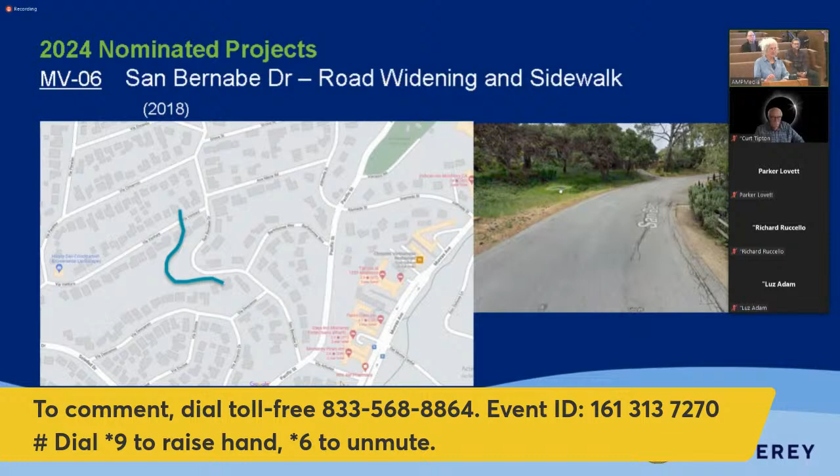I didn't realize that was on the list. I was just saying to my husband 2 weeks ago, they really need to put that curve on a neighborhood vista, or whatever you call the NIP program, because it is seriously one of the most dangerous small little spaces in a walk to the mall.

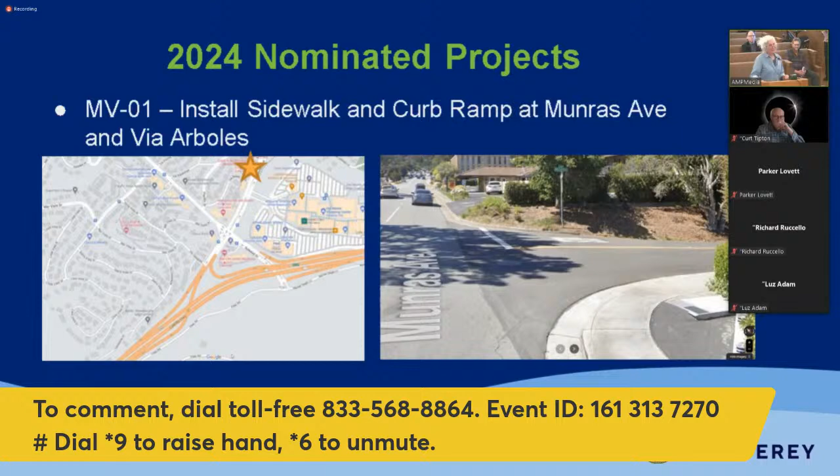If you're coming across and up the street, like from San Bernabé across and then head toward the mall, there's that one little spot. I mean, it's not very big, maybe 2 of these wide and 2 of these that way. And those cars rush by you and there's no sidewalk. It's a sloped hill, and so you're kind of trying to stay on the dirt as the cars are going by. It's really, really hazardous. So that being said, I'm glad to support that.

I'm really here to talk about MV06. So the neighborhood got together back in 2018, and a number of residents came together to put forward this request to address the real safety issues that exist in the San Bernabé curve.

It's hard to see on either of these pictures, but this curve actually goes downhill and then back uphill, and curves at each side of the hill and narrows in places and has no sidewalk. So children from school walk there, mothers with carriages push their babies, people bicycle, many people walk, some of us less young than others. And the kind of agility that you need to have to navigate that is just amazing.

So we are here. We have met, as was said earlier, with Reggie and the engineer who developed the plans, because thank you, you all approved it a couple years ago to have the plan written. And the neighbors in general that we've talked to, 6 out of 10 are very much in support of this.

We've had some changeover in ownership of the property and we're reaching out to them. We've reached some of them, and in general, the folks that live there really support having a safe walkway and are not really concerned about the impact that will be on their property.

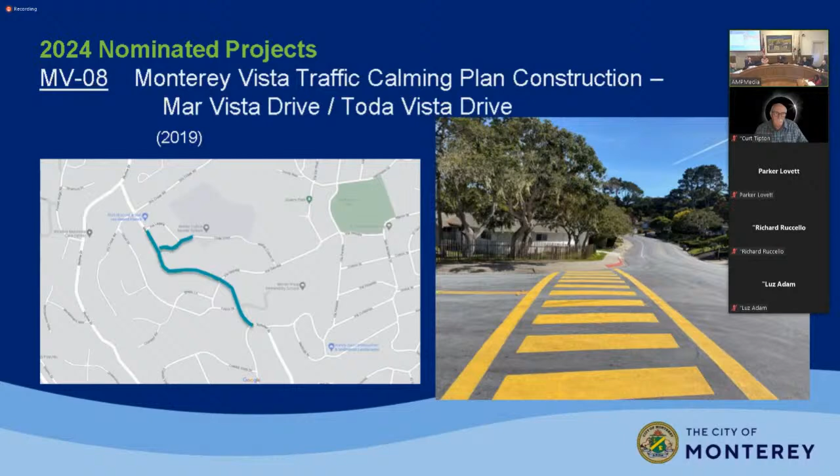In the meantime, Fisherman's Flat. This reminds me, this commercial thing that was brought up, the same thing applied to a project we had a couple years ago that was on the corner of Munras Avenue and El Dorado. There's an old motel there and there's dirt along, and right now people have to walk in the dirt, and it's a problem where we had to get the owner of the motel to fund it. And I drove by there just a week or so ago and it's still dirt. It's the same problem, getting the commercial person to pay for it. So this is not a new problem, this is a problem we've had before. So good luck, I'll talk with Reggie and we'll work on the legal stuff for that sidewalk project. You bet.

Other comments, questions from the committee? Linwood.

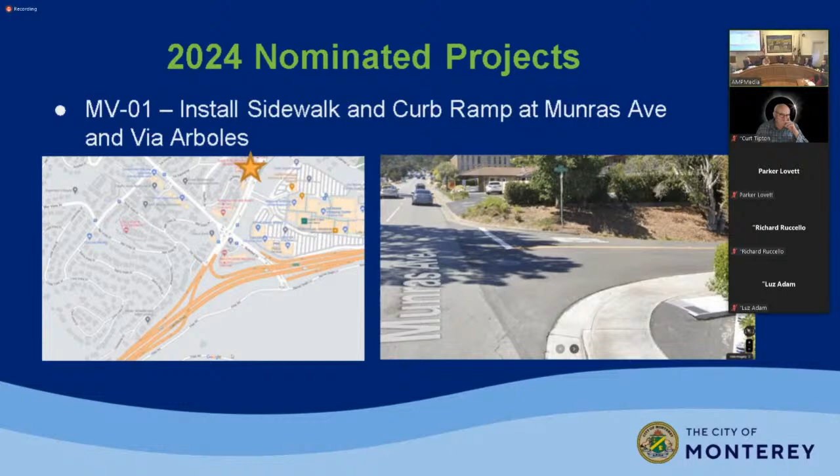I'd like to comment on MV7 regarding the highway sign. I go through there quite a bit when I'm going to work, and there's constantly people that have lost their way and they can't get to the highway, they can't figure out where it goes. The regulars obviously know how to get there because they've been doing it, but they wind up doing U-turns, illegal U-turns, and it causes traffic problems. So I really feel that we need that highway sign there giving directions, and it won't cluster up too many signs. It's a needed one, definitely. Thank you.

Other comments from the committee? Then I'll add real quick my kind of question comment. I remember us asking the city to write letters to commercial property owners, notifying them that they need to put it in. But the interesting thing would be, can you get just one side of the corner done and not do both sides? And the question I had is, in the old days, we used to have a sign department, so signs were not something we had to worry too much about. So I don't know if we can just refer it to the sign department. Yeah, we still have a sign department, but I don't know, I can follow up on that. Thank you.

Hey, thank you everybody, that's Monterey Vista. Next up would be New Monterey. So let's hear our overview first.

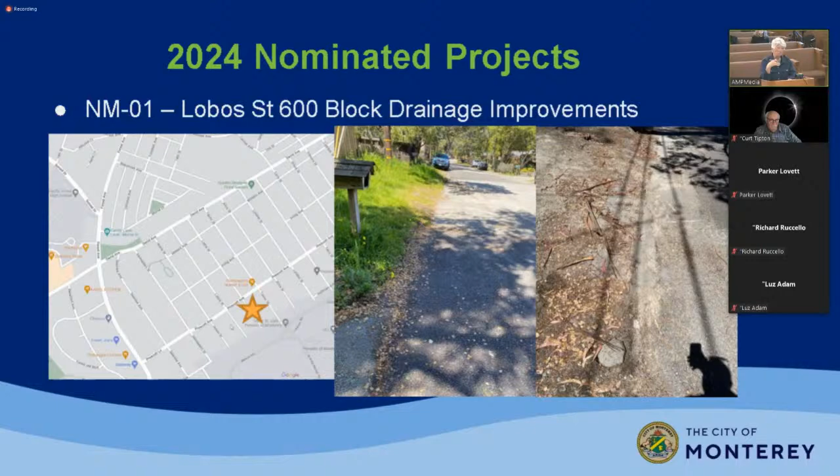David Avenue open space. The New Monterey area plan says that if it is obvious and we want to have open space, trees, green space, that this is something that we want. And the school district, it was an oops. When they transferred the title to Hilltop, what became Park Center, they forgot the other parcel.

This is the entrance to the neighborhood. It is a stand of trees. It is not the original, it should not be the cost of the original project. It would be only for the legal transfer of title. It does not need a lot of tree work, which really inflated the price before. It's finishing something that should have been done.

The New Monterey 8 or 12, Hilltop Park Center roof has been leaking like a sieve for years. It really needs work. It would be lovely if the city could share the cost of fixing their facility.

New Monterey 11 on the Cannery Row sidewalk, traffic calming, that was not part of any traffic study that was done. Cannery Row 16, Cannery Row restroom design - Cannery Row business people are going to pay for the maintenance that was never part of the downtown wharf restroom study. It never was. It should not be held up for that.

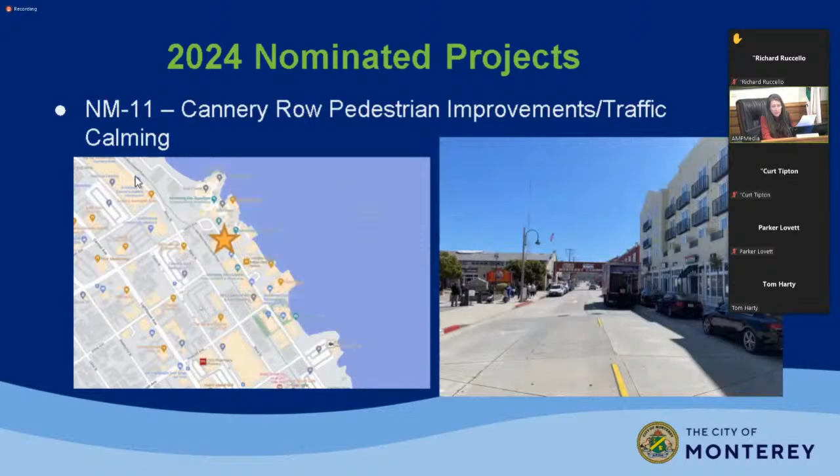If not, I have a quick question or two I wanted to sneak in. One was, we actually did look at the grass on New Monterey 09 in the past, a number of years ago, and I think one of the issues is that place continues to have issues around how that grass grows in that space with that dirt and that drainage. So I don't know if we want a brief comment on that.

Okay, my first question is, is that a shared use area? Because when there was an NIP project there to put playground equipment, it was always a problem getting in there because they would lock the gate and the neighbors would call all the time. So that should probably be checked. And the drainage—that part of town does not drain very well, so they always have problems with the turf there. I don't know if the public's allowed to use that when school's out. I think that they do. Yeah, because they used to lock the gate and it used to cause a lot of problems there.

So the answer is, yeah, they do have a shared space. Okay, cool. And another question I had was, does the neighborhood want to combine the solar panels number 5 with number 12?

The restoration, I can check back. I'm getting a no, looking at the audience. No, in terms of the roof that is included in 12, so the solar panels are separate. So obviously we probably want to do the roof first before considering panels.

Right, thank you. I find it interesting that maybe our neighbors to the north, CSUMB, did not use any of the military buildings. They tore them down because it was too expensive to retrofit them.

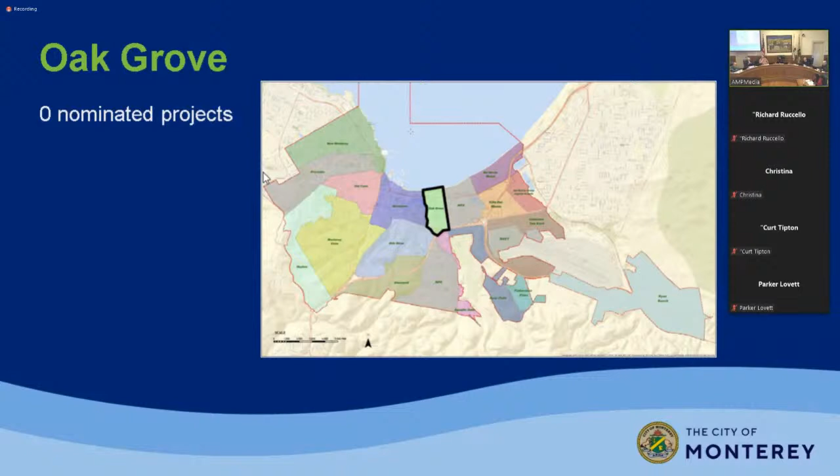We can ask. All right, so with that, I think we'll move on to Old Town. Let's see the list. There's no projects proposed in Oak Grove. And there's 3 Old Town proposed projects.

There's Old Town 01, decomposed granite at the step sidewalk maintenance at Harrison Street and Veterans Drive. And we have an existing project to do similar work. You can check for overlap.

Old Town 02 was a returning project. It's an old accessible park desktop survey. I think the idea was to try and find open space in the Old Town neighborhood that could be used as a park.

Old Town 03, another returning project, would be to honor garden at the current fire department, police department facility. I know we've had some long discussions on this last year. There are plans to build a new facility. I think in the past, we've decided that it would be best to wait, I guess.

And then one other proposal on this one would be to maybe include the design of an honor garden in the design of the facility and have it all done at the same time. Those are the Old Town projects.

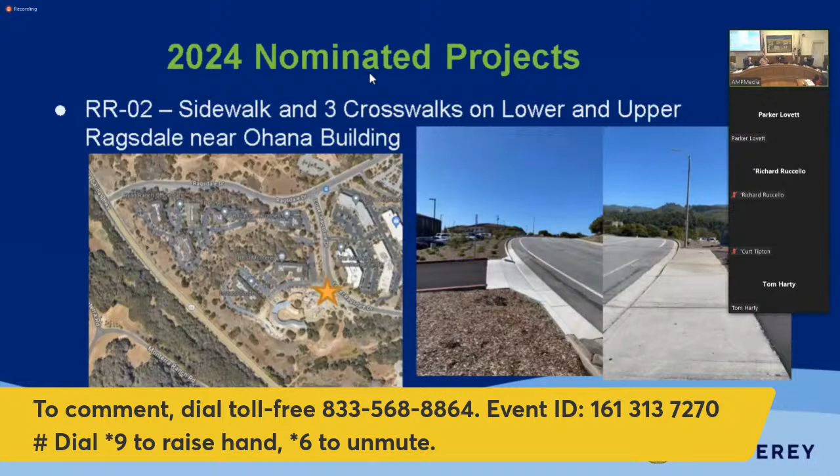All right, and we don't have a representative from Ryan Ranch to add color commentary, so I think we go right to the chamber. Are there any comments on the Ryan Ranch projects? I don't see any in the chamber. Do we have any online and on the phone comments or questions or clarifications for Ryan Ranch? No public comment raised. All right, let's bring it back to the committee then, Ryan Ranch.

Monterey Vista and then Skyline. I'd love to hear from pickleball players, since I'm understanding they were a little caught off guard by the downtown tennis center offering to put in 8 pickleball courts, obviously charging money but being able to do it at a much faster rate, and I think also being less stress on the city for maintenance and definitely less construction costs. So I haven't really heard from pickleball players whether they think they'd like to play down there, or would rather wait for courts out at Ryan Ranch whenever that may or may not happen. Thanks. Thank you, Skyline.

Isn't Ohana a commercial enterprise? Shouldn't they pay for their own sidewalk? Montage.

Quick comment about that, the Fisherman's Flat. I have PT quite frequently at Ryan Ranch, and I drive by there frequently, and I watch them spend millions of dollars on that brand new building. And nobody from the city figured out they needed to have sidewalks. Incredible.

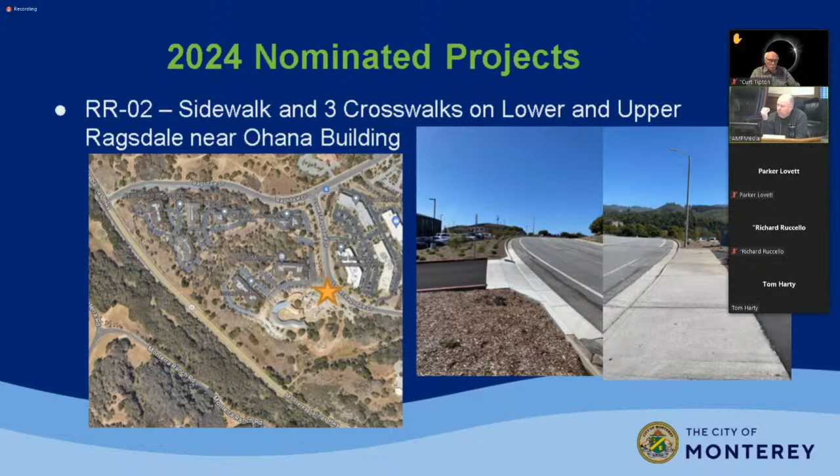Other comments on Ryan Ranch, Deer Flats, and then I don't want to speak for the pickleball people either, but I do recall when they made their presentation, it was about the percentages of the population and how much availability, and I remember they wanted more. So I tend to think they would still want to see this project go through, even if it's being offered by a tennis club downtown.

Okay, Glenwood, and then we'll go online. No, you don't have a comment? No. Okay. All right, so let's go online.

Kurt? Yeah. So is the design complete? And in that design, I believe we were talking about a restroom and handicap parking and that type of thing for RR1? The design is not complete, no. Okay, and those things were items we were going to look at in that project.

Okay, so it's hard to fund this if we don't know exactly what we're funding. Well, I think the request is, and maybe that's my fault - the request is specifically for $200,000. Okay, and I believe there was some discussion in the request of matching.

Okay, so to go over the full application, they're saying the applicant is requesting $200,000 for construction of pickleball courts. Yes, they are. There's been discussion back and forth with the proponents where they talked about raising funds on their own and matching what NIP and/or the city puts in.

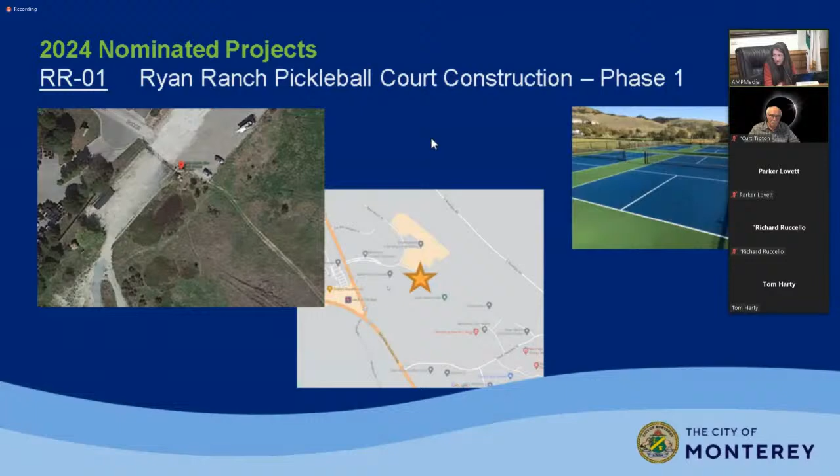Okay, thank you. All right, I don't see any other online. Parker? No other comments. Thank you. All right, bring it back. Any other comments here from the committee? Nope. All right then, that moves us on to Skyline - let's see our list.

There are 3 nominated projects in Skyline. Skyline 01 is Veterans Park Trailside educational signage, geared towards the trees and plant life in the forest area there. SK02 is install new fencing in the bocce and basketball court area at Veterans Park. And SK03 is a returning project to look at erosion control in the day use area. Those are the 3 projects in Skyline.

Thank you. Skyline, do you want to give us some clarification? Well, Skyline 1, I'd say on the previous comment that was made about - we have a signs department, don't we? This doesn't seem like a giant project when it's kind of guessed at $1,700-1,800. So I wonder, well, there's a bid in here for $1,622.75 - is this really an NIP project?

I don't know, NIP project? You talking to the mic? Phone's on. I guess I gotta pull it closer? Yeah, I gotta get my face closer. Hi folks, is it working now?

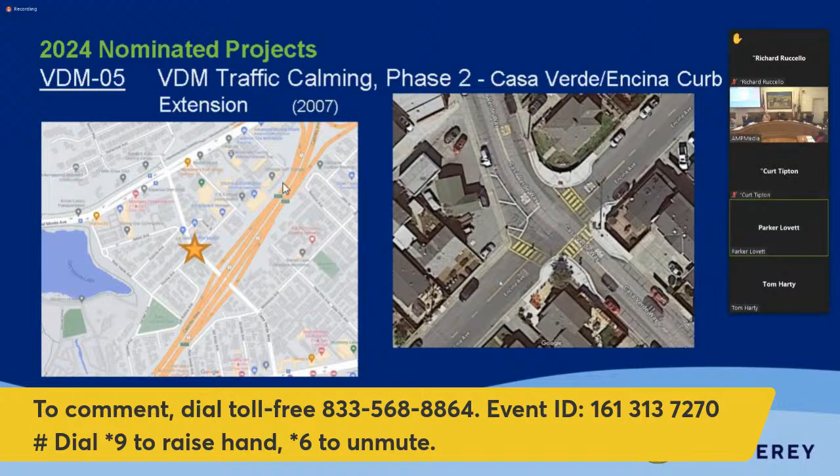So do we have anybody in the council chambers that would like to address any of the Villa Del Monte projects? I don't see anybody coming up to the podium. So if we take a look online and on the phone, do we see anybody? No comments raised online. Oh, one committee member. So I think then we'll bring it back to the committee. And since Richard got his hand up so fast, he's in there. Thank you.

My concerns on remodeling are the same with this fire station—they're all in the same time period. I want a safe structure. I know they condemned the hose tower, which they use for training; that has to be reconstructed too. So it's more than the roof, it's more than the kitchen. It's make the building safe, then do the modernization.

I do want to comment on the Casanova Oak Knoll project. Maybe Reggie can tell me what it is. I think it's an old project we dropped. Is that the, what do they call those, the dry wells project? Right, yes, it's a tree box catch basin.

Years ago, we had a problem with flooding at Grandma's Kitchen at Fremont, which stops the entry and exit of our neighborhood, also floods the northbound or eastbound lane, the right lane of Fremont. I've seen it underwater with cars rooster tailing. Engineers' response to that project was to design a dry well the size of a truck, a big hole in the ground filled with gravel, where this excess water would percolate on Dundee and on Lerwick to solve the problem of all the water going down the hill. We got the bill for that, and it was $600,000, but the key element to us was it only solved 5% of the problem, the city engineer's estimate. So we dropped the project. Reggie, you may erase this project—it no longer exists, it won't solve the problem.

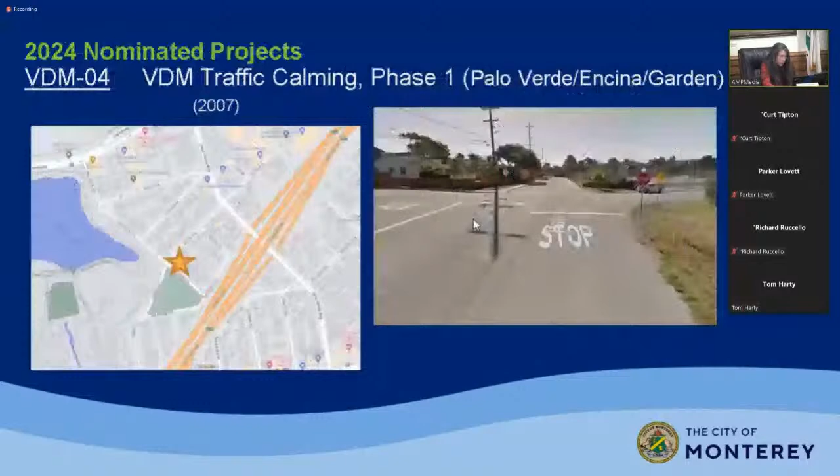I also have a question. I think it might be helpful for us to understand — when we approved the mosaic murals in the underpass, we talked about that as a beautification because so many visitors see that as their first look at the city. And I do think it had art in it. So when we approved it, like last year or the year before, I think some clarification of why we're asking for more money for art would be helpful.

Well, yeah, so we'll have to — I can do some more research and follow up, and we can discuss that the next time this one comes up.

Yeah, the rumor I heard is that the city council took it out. And that's why I want to clarify — well, we didn't get city council... so the original budget for the project was 750,000 roughly, I believe, and city council approved like 600,000 back in 2023, I believe, or '22. So that was somewhat of a sticker shock for the price, but this could be for the difference, whatever that is, like 150,000. But I can follow up and do some more research.

Okay, so yeah, we have a situation where the city council amended the NIP's approvals after the NIP committee approved them. Yes. And they reduced the funding for this project. Reduced our funding. Okay, good.

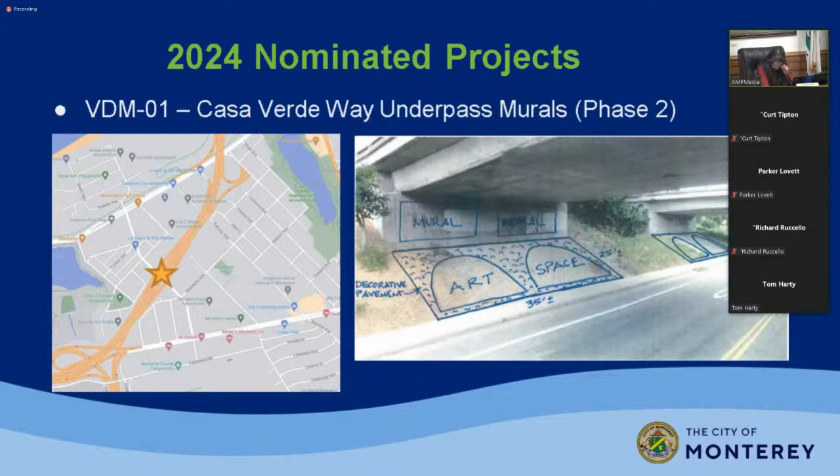Any other comments, questions, Villa Del Monte? Right on. Okay, so next we have multi-neighborhood. Just want to be sure I wasn't skipping anybody. Multi-neighborhoods, so let's see that list.

Okay, there are 14 multi-neighborhood projects. All right, multi-neighborhood 01 is citywide ALPR cameras. This project is led by the Monterey Police Department. The city council approved the police department to move forward with the cameras at the April 2nd city council meeting. So the question is how we want to move forward with this — if we just want to provide the funding to the police department, or if there's something else that the committee has in mind.

MN02 is recreation trail, separate lanes for bikes and pedestrians. MN03 is the combined fire stations 12 and 13 rehabilitation. MN04 and 06 are combined underground utilities programming to address what we all know happens. MN07 is specifically for Del Monte Avenue undergrounding. MN05 is community-wide forest management. MN08 is for a comprehensive fire safety analysis and to develop a hazard reduction program specifically for the urban forest.

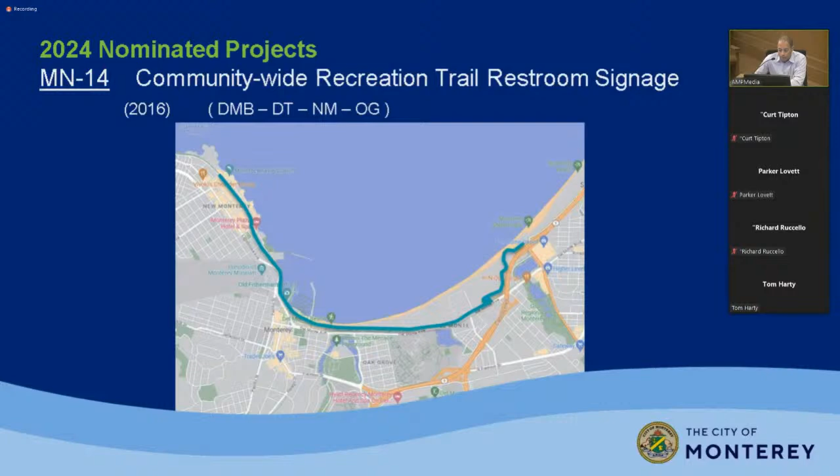MN12, recreation trail bike repair stations, specifically 2 — this is a returning project. MN13, Holman Highway to Viejo Road bike path renovation — returning project. MN14, community-wide recreation trail restroom signage — returning project. And hey, that's it.

All right, thank you. So these are multi-neighborhood. I would propose that, starting with multi-neighborhood number 1, if there's a particular rep who's kind of the lead on this, we'll have them speak, and let's go down through and get the reps' comments on these before we go out to the committee. So is there anybody speaking to MN01?

Fisherman's Flats. Yeah, I was at the city council meeting — Reggie's talking about the police chief. He's the guy that needs to tell us how much money he wants, basically whether he wants any money or not. Agree, it's my project, Jamie. Question is how much? Richard — yeah, this is not proposed by the police department, it's proposed by me.

I proposed this project before the council approved the cameras. I thought it was very important for the safety and security of the neighborhoods and all residents of Monterey and visitors. What I proposed is the purchase and installation of the cameras. I put a specific amount, I believe it was 138,000. It's just to put the cameras in and buy them, not for operation or upkeep, but merely to show citywide support for a very successful force multiplier program for law enforcement.

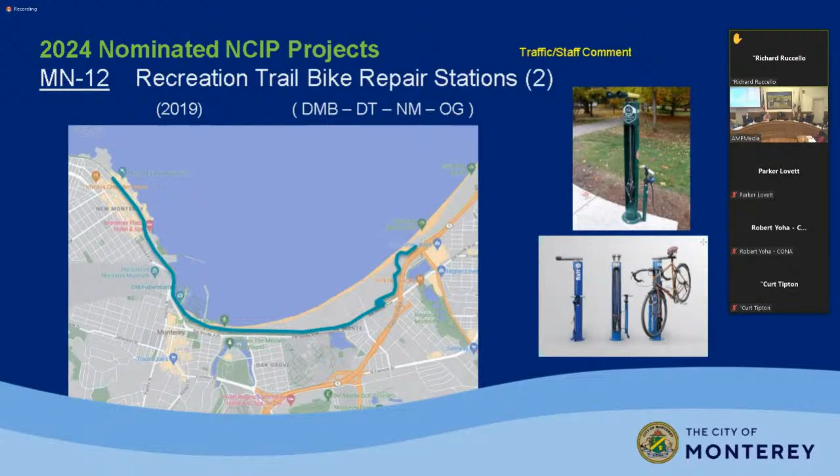Thank you. I have three comments. One, I've been doing quite a bit of research on the Paradise Campfire and the Maui fire. There are a lot of similarities to Monterey in the small number of escape routes—Deer Flats has one, Fish Flats has two, Skyline depends on which direction you're going. Monte Vista the same. For our fuel reduction project, I would like the Parks Department to look at hardening the escape routes. I've been told that in Monte Vista and Skyline there are many pine trees leaning over the street. In those fires, there were high winds and very short warning.

It's not hours, it's minutes when a fire crowns and goes across the top of a forest. You have to be able to get in and out of your neighborhood—in for fire suppression, out for residents. What worries me is those leaning trees. If during high wind or a forest fire the tree goes down, that escape route is blocked. That's what I mean by hardening the escape route. If the tree falls and brings power lines down, you have to find another way out. You have minutes, and we don't have an up-to-date system to tell you to go right, left, straight, or back. We don't know. In Maui, a lot of cars were driving into the fire instead of away from it because of the lack of communication. But if we can include those streets, those escape routes, with the fuel reduction, I believe it'll make this a safer city. So maybe they can increase the estimate at our next meeting when we get numbers for these projects.

The second item I want to address is undergrounding. It's very confusing to me—if we put a pot of money down, how do we use it? How is it used in a reasonable period of time? I supported the North Fremont undergrounding; it's number one in the city. It has accumulated several million dollars, and I am unable to find out where we are after 10 years. I just hope that if we do a pot of money, it's not 10 years before we get some idea of when we do the property surveys, when we get an estimate of the actual costs, when PG&E designs a system. These questions need to be answered before we vote. So I want some clarity on how the money is used and when it will be used.

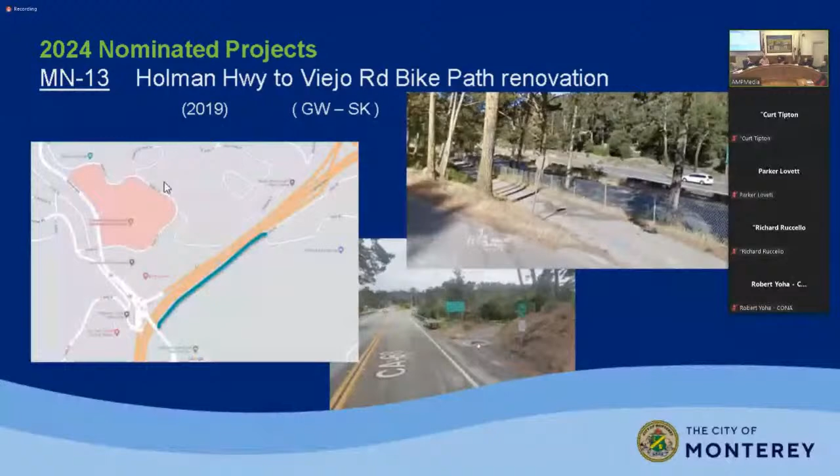And the next item on the agenda is NCIP spokesperson reports. Rick is not here and I have nothing to say. Oh, there we go, Reggie. I have a report, I'll make it brief in the interest of time.

As we talked about earlier, the public restroom study is pending award by City Council. Forest management's ongoing. Spray Avenue tot lot resurfacing is underway with completion tomorrow.

Laguna Grande parking lot lighting construction starts next Tuesday. Old Capitol Site Master Plan, there's a follow-up meeting on April 23rd at the Casanova Oak Knoll Park Center. The ALPR program was approved by council on April 2nd.